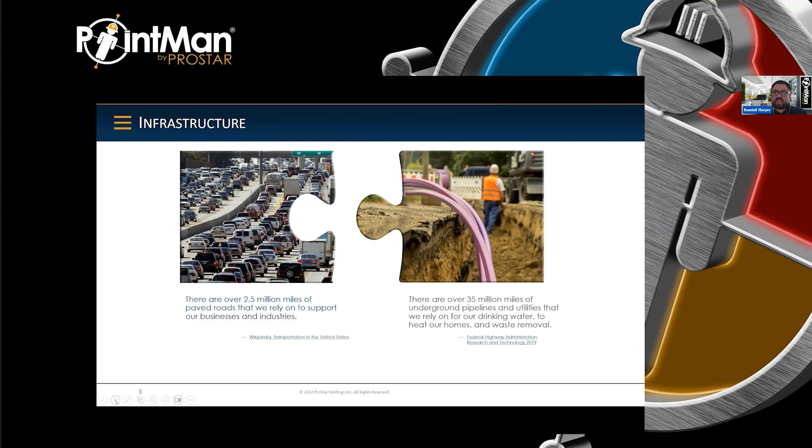So there are 2.5 million miles of paved roads that we rely on. But on the other hand, there are 35 million miles of underground pipelines and utilities that we rely on even more. And this is for drinking water, heat, waste removal, and other things like that. And these infrastructures are interconnected. You can't work on the surface without impacting the below ground and vice versa.

Now, this is a cost saving study that was conducted where one project was using PointMan and one project was not using PointMan. They're of equal scope and value in the same city, and they were both 10 miles of highway over 3 years. Project 1 had 130 crew members, and Project 2 had 100 crew members. Project 1 had 3 line strikes. Project 2 had 147 line strikes. Can you guess which one was using PointMan? Well, that would be Project 1. But what does that mean in dollars?

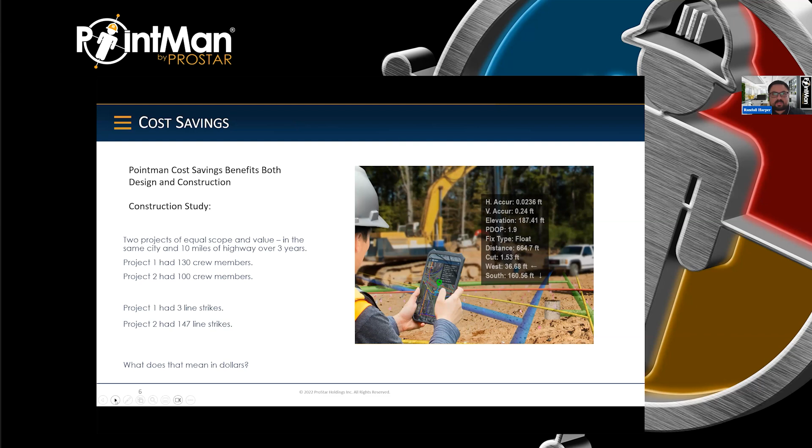The problem is utilities and pipelines are mapped using paper maps called as-builts, a form of design drawings that are how the utility or pipeline is initially planned to be installed in the ground. So that's the legacy way of doing things, using paper and just hand drawing everything based off like 35 feet west of the curb, or based off some survey marker that has been on the ground for the last 100 years.

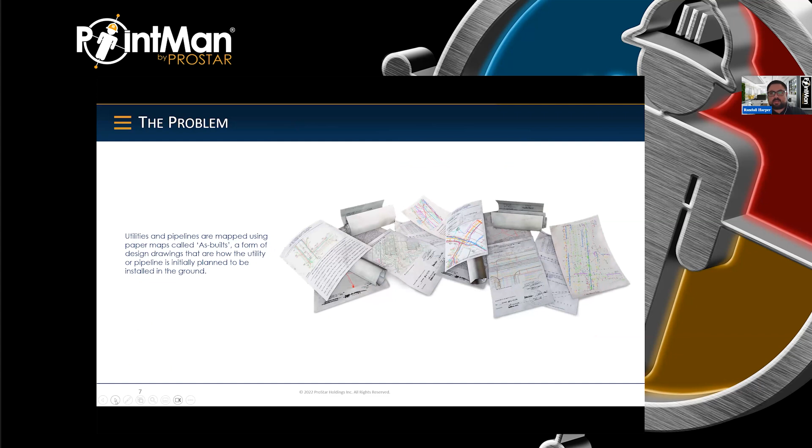Now, current practices include using electromagnetic locate devices and a spray paint can to approximate the location of where a utility is buried. The current methods do not provide precise locations or any supporting data, and stakeholders that take on liability do not trust these markings. What this means is you have people EM locating, painting the ground, and then coming in and resurveying and re-EM locating because they don't trust those paint marks. So they're doing double work because they don't believe what they're seeing with their eyes.

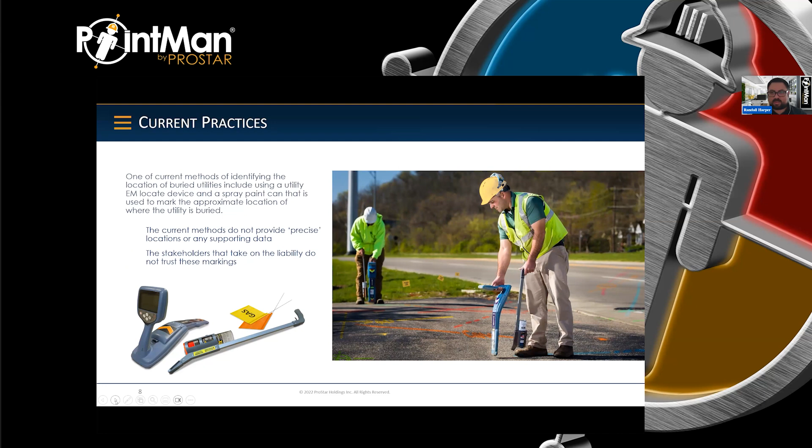And this is only getting worse every year because every year we are installing more and more underground, including 300,000 miles of fiber optic that goes into the ground every year in the United States. And that's not including the fact that we have to replace pipes for water, for sewage, for gas over time, and do a bunch of maintenance on the infrastructure in general.

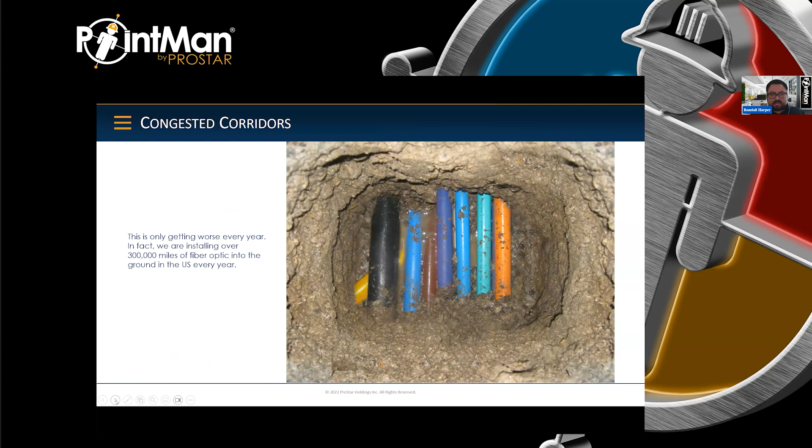A few key things to know about PointMan. It provides the ability to capture, record, and display the precise location of critical infrastructure both above and below ground, including buried utilities and pipelines. So what this means, just based on the image here, is you're digitizing everything by capturing it with your mobile device that's hooked up to your GNSS receiver and your electromagnetic locator. So all of this, instead of having to transcribe it on paper, is immediately digitized and turned into what is essentially a digital as-built, because it also contains the metadata associated to those features that you captured.

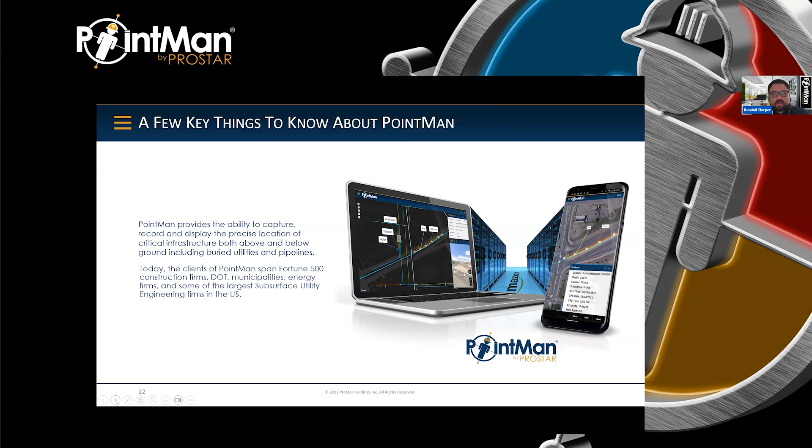How does PointMan work? Well, you take your locate device, pair it via Bluetooth to your mobile, and your GNSS, pair it via mobile, and both of them will sync up to the cloud after you capture things in the mobile device. It's that simple.

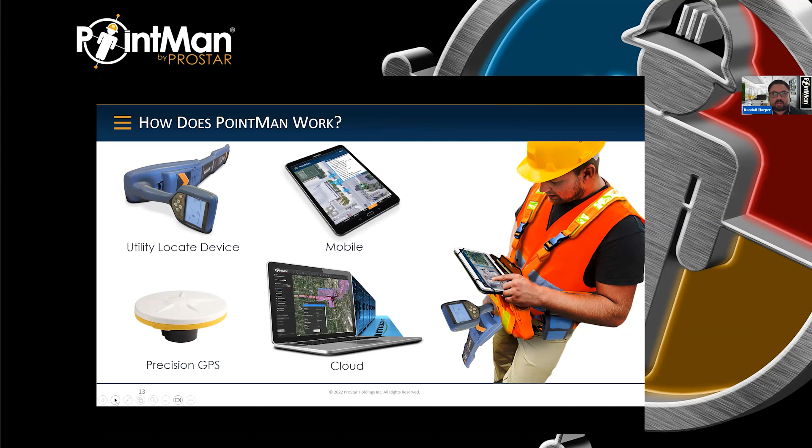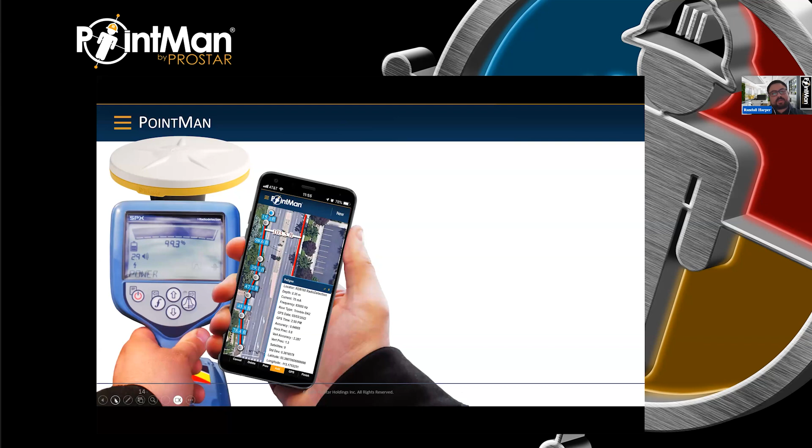So this is just an example. You can see this is an example of an as-built line that was on the right-hand side, and it was collected on the left-hand side with the Radiodetection and a Trimble DA2. And you can see the line is just on the other side of where the as-built said it was, and it's off by 100 feet. And I'm sure that we've all been there. And that is a pretty common problem as it relates to old as-built practices and modern locating.

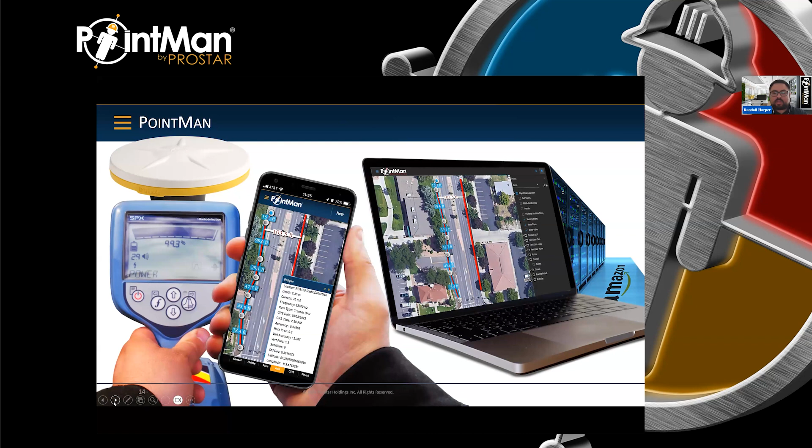But here you can see that what you see on the mobile is also visible on the cloud as well. So you can view it from your trailer or your office, the exact same thing that your guys in the field are seeing. So here's the PointMan workflow. Capture field data, process it in the cloud, and it's made readily available to team members.

We can capture precise test hole data with PointMan. You can include images as attachments, and you have the metadata associated with all this data as well. So you can see this selected point here in blue has the metadata on the left-hand side and then the image on the right. So you can cycle between those and basically see what the guys in the field were seeing.

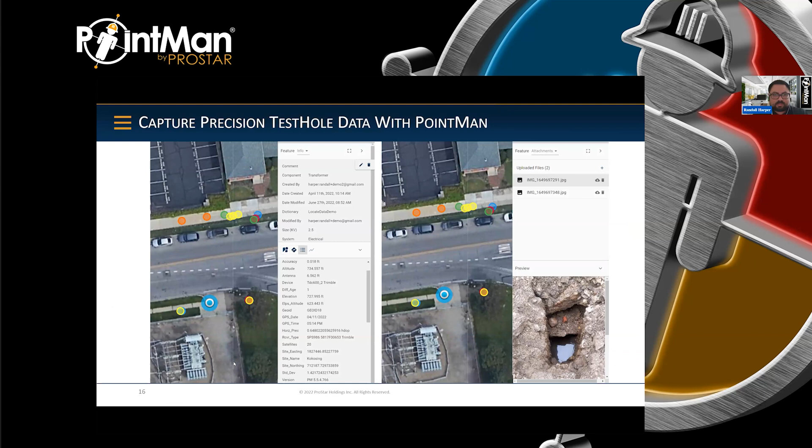You can recall and visualize data. So in this case, this is kind of just what it looks like to the guy in the field. But if you look at the tablet to the left, you can see that what he's seeing is actually how to get to that green point.

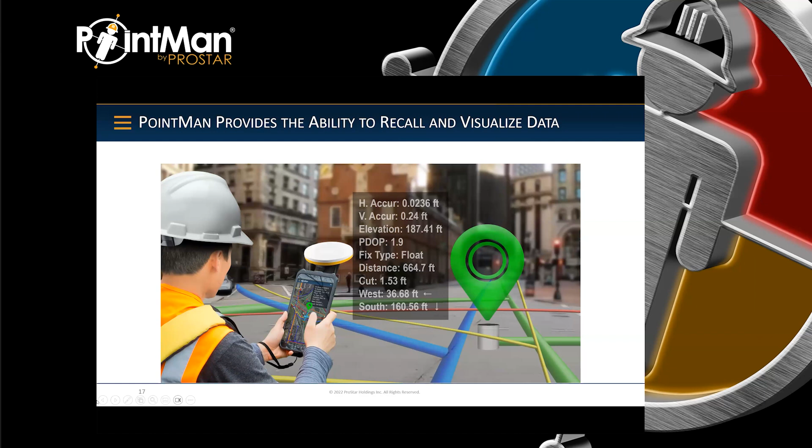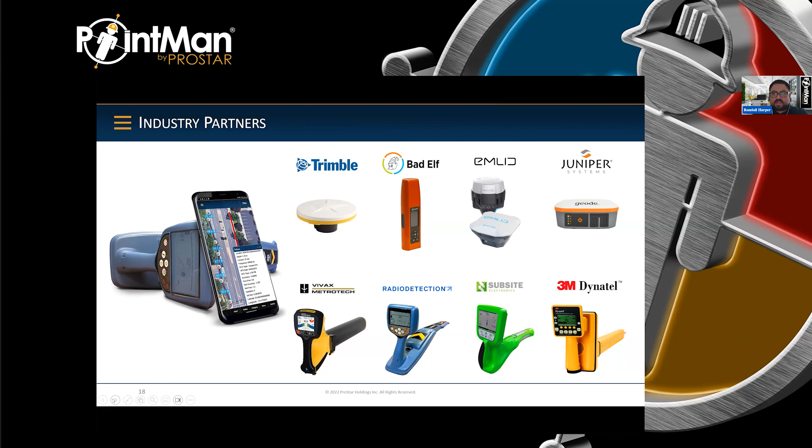Some government regulations. Digital records are becoming more relevant in this modern age. In fact, state governments are beginning to see this and have begun rolling out new regulations. One of them is the California Code 4216.3-5. Starting this January 1st, all new subsurface installations shall be mapped using a GIS system and maintained as permanent records of the operator. The CDOT mandate: the use of PointMan to capture digital records is mandated during all new installs in Colorado DOT right-of-ways.

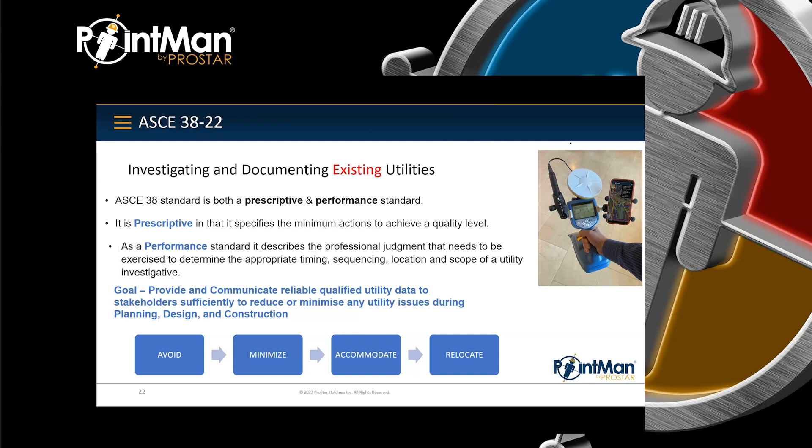And have the right of way to do it. So all of that takes time and effort, and that's what we're trying to accomplish. But we have a new standard, ASCE 75, that is also in play. And this started about the same time as 38.

In 1994, the National Transportation Safety Board had a summit where several of us were speaking. And from that summit, there was a recommendation that we do need better records. What we call as-built are not as-built. They're as planned or as designed, and there is no definition of an as-built or a legal requirement or a standard out there. So the NTSB said somebody needs to do it. Well, quite frankly, in 1994, that cry went out, but nothing happened.

However, in Canada, they were looking at developing their own ASCE 38 and started looking at it and adding in elements of how can we make better records, and decided, no, we'll just reference ASCE 38, but we'll come up with a standard on how to make a better utility record that's more accurate. And they called that CSA S250, and that was published in 2011.

Well, finally, in 2011, we looked at that here in the U.S. and said, you know, we need to get off dead center here in the U.S. and do something about this. So in 2013, ASCE put up a new standards committee. 10 years of development later led to ASCE 75-22.

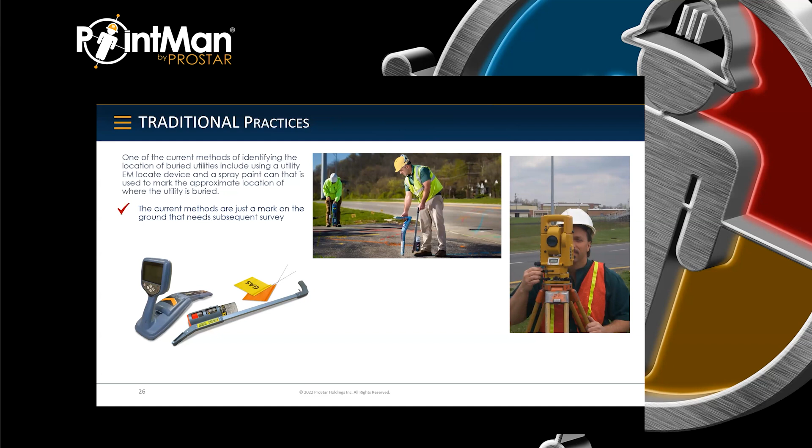But one of the things that we always had to do was, sitting in the office, figure out, is the mark on the ground right? Do you trust the person using that? Was the equipment calibrated today, or is it off a little bit? Was the person paying attention?

And without some mechanism to check that, other than running back out into the field and doing point checks sufficiently, and then checking to make sure what was in fact put on the ground ended up being surveyed, and checking to see if that ended up in the CAD file correctly. All of that was a lot of necessary quality assurance steps that you had to take. But what we're able to do is look at this data in real time in the office while it's being collected, or the next day.

Pretty soon, and we can look at it and say, oh, look at all of this data that's being collected from this pipe and cable locator. I've got the positioning aspect of it when it's got a GPS attached to it. It's giving me this signal strength. It's giving me this current direction. It's giving me this depth. It's giving me, I'm using this particular frequency. All of these attributes and metadata are available for each point that I collect in the office.

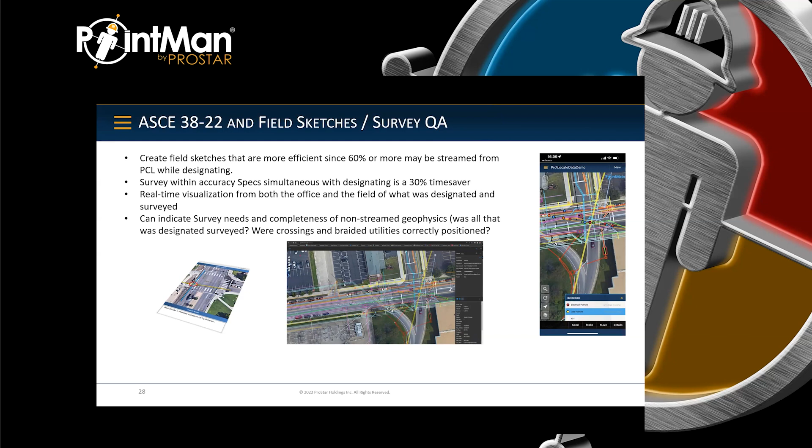And then you can also use that real-time visualization, both in the office and in the field, as you saw, in the cloud and on the tablet or phone, to see where you stand. This was surveyed rather than have a different crew out there. You can also then add in those geophysics that aren't compatible yet with PointMan, such as GPR, time domain electromagnetics, maybe a pipe and cable locator that doesn't have streaming capabilities, maybe a magnetometer. All of these kinds, and in a really complicated area where the utilities are crossing over each other and they're braided, it's really difficult to make sure that your field sketch is showing that correct geometry. So this real-time visualization is pretty nifty for that.

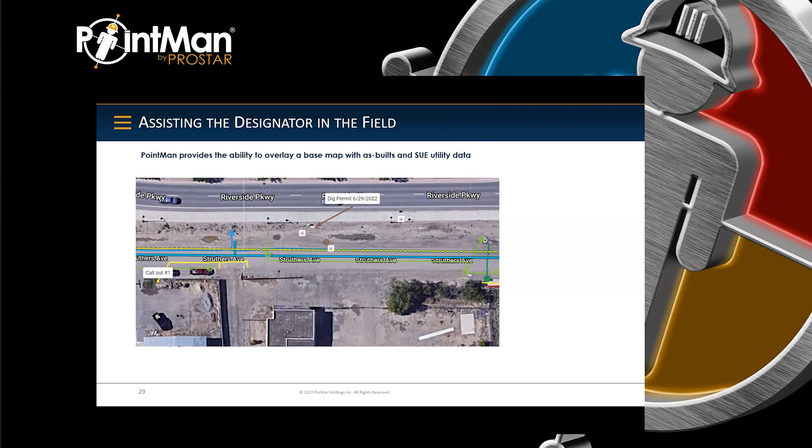So you can overlay also the existing record information. So before you even go out there, you can add in record information, and maybe it gives the designator in the field a little bit of a guideline as to what to look for. You know, there's two schools of thought on that. Don't furnish that information and they won't be biased, or furnish that information to help them not make an omission. So it's six of one, half a dozen of the other, but having it available at your beck and call, I think, is a good thing. It's just a matter of how much you trust it and when you use it and who you allow to see that data.

Another thing is, we are beginning to add depths to our data in the field so that we can bring it back and create a 3D model. It used to be that you'd have to put a mark on the ground, put a shot number on that mark, and either write in a notebook or write on the ground what the depth is, and the surveyor would come behind it, pick that up, annotate that depth in the field book, and it would end up with the CAD operator, and they'd have to do it. Lots of opportunity for transposition of numbers or mistakes. You know, another thing I've seen is people just writing a depth on the field sketch.

Well, you don't really know where that was. Was it in front of this house or the other house? So it's a time-consuming effort and a loss of quality to track this depth on paper or multiple touches of that depth information. But what we're able to do with PointMan is automatically, at least for the pipe and cable locator, get that depth. And we know that it's a pipe and cable locator.

So when we build that 3D model, we know that the depth is originating from the middle of that electromagnetic field, the middle of where it is originating from. So the middle of the pipe, which is important. If we had a depth from a GPR, for instance, it would be the top of the pipe. If we had a depth from a sonde in a big empty storm drain that was on a curve, it would be on the bottom of the pipe.

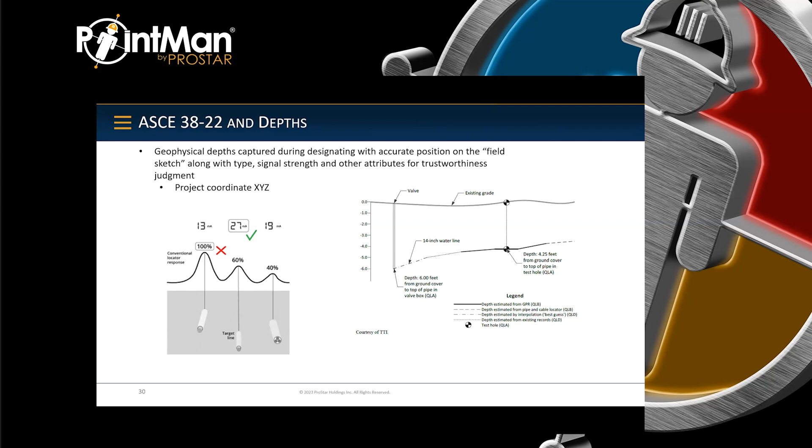So by this method, not only do we annotate a depth, but we can say this is the instrument that got us the depth, or the procedure that got us the depth, so that we can know when we're building the 3D model how to center the size of that structure in there. So another advantage there.

You write a note and you'd put it in the file saying, I'm having trouble in this area. I need my supervisor tomorrow or the next day to do this work because I can't do it. Or this instrument isn't working. I need somebody to come out with GPR. And if you don't write a field note, somebody's going to forget about it. It doesn't get done. So you have this field note, but on the field note, you have to say exactly where it is you're having this particular issue.

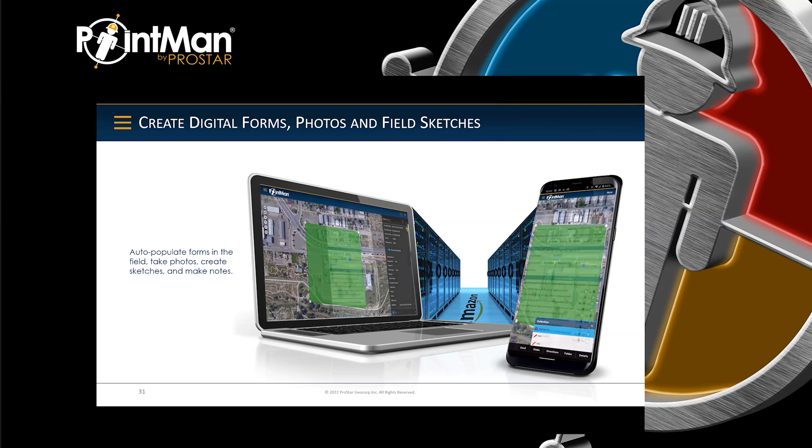With PointMan, you're able to create a point and attach a field note to that point. The same with a photo. So you're able to again be a lot more efficient with a higher quality with the concept of attaching at a particular area a form, a photo, a point, a field note, that kind of thing.

Now here's another advantage, which is a little bit more esoteric, but it happens all the time. On the left, that is a typical one call mark for an intersection. It's pretty busy, pretty messy. Looks like a pile of crap out there in the street, right? And on the right is what one particular SUE firm has said, you know, this is what my paint marks look like. Look how much neater that is.

Well, that's a pile of crap too, because you're not marking for damage prevention. You are marking for just the information needed to pick it up, to get it on a set of plans and know that you picked it all up. So you don't need these big long marks out there.

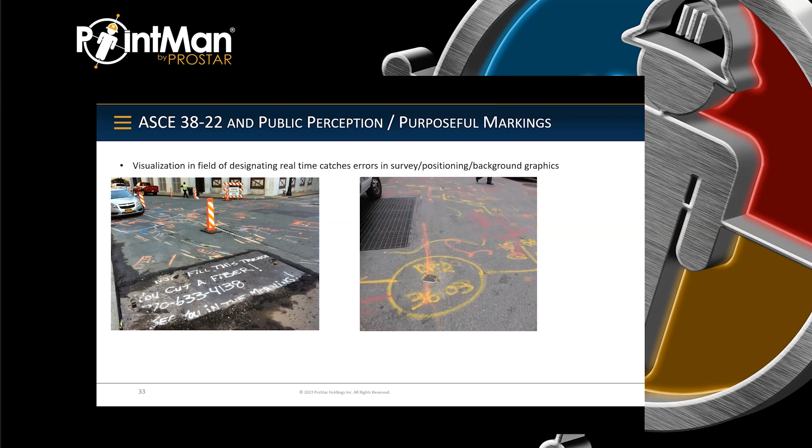So, you know, it used to be, okay, we're surveying this in a separate operation, but we're going to leave our marks very short and sweet, only big enough for us to know what it is we are surveying, and then go back and do some quality assurance checks. But now on the right, maybe you don't need marks that are even that neat and small. Maybe you can just put a point. Maybe it's just a keel mark on the ground. So it's a real advantage in what I'm going to call a purposeful marking.

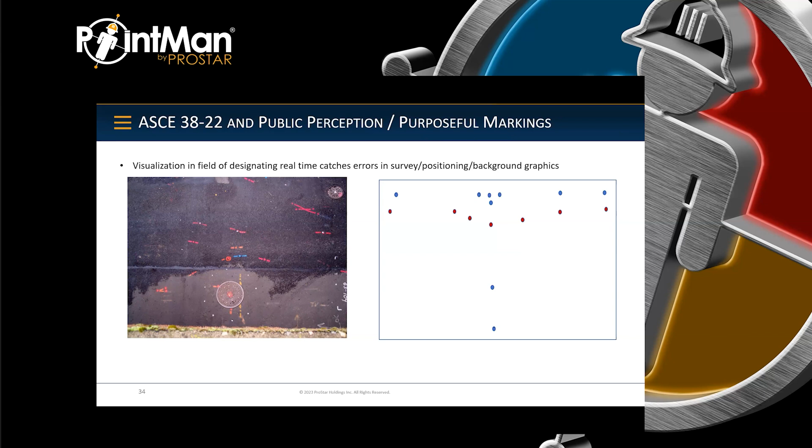We do a lot of test holes to actually prove what our geophysics are trying to tell us, or get information on size or material of a particular utility structure. And it used to be we'd have to dig it, expose the utility, we'd create a sketch, we'd do some measurements, we'd repair it, we'd have to go back out and survey the surface, we'd have to transfer that data to CAD, we'd have to do some QA, and then it would be finally given to the engineer to seal. And so he's got to assemble all of that.

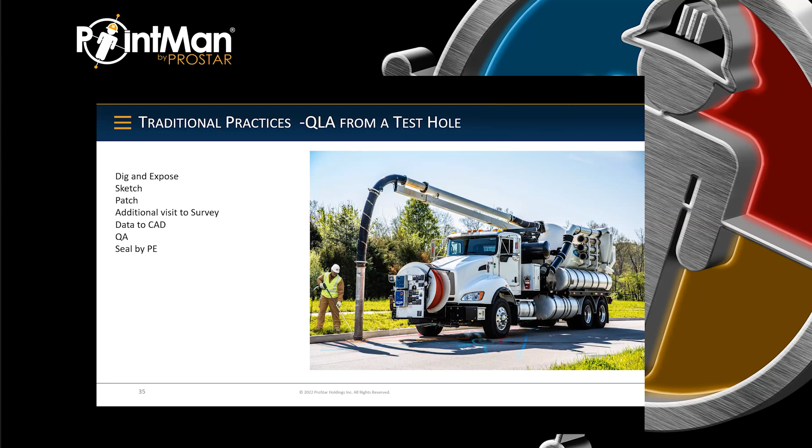But you could do it all in one step. You know, dig it, collect the data, survey it, patch it, look at it in the field in real time before you patch it, so you don't have to dig it back up if there's any question, attach a photo, and you're done. And the engineer has a way to monitor that in real time. Again, reduces field survey time, perhaps remobilization, questions that happen, all of that.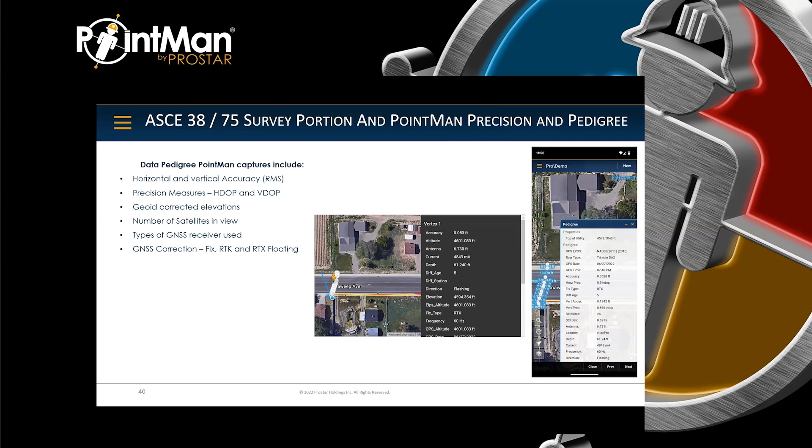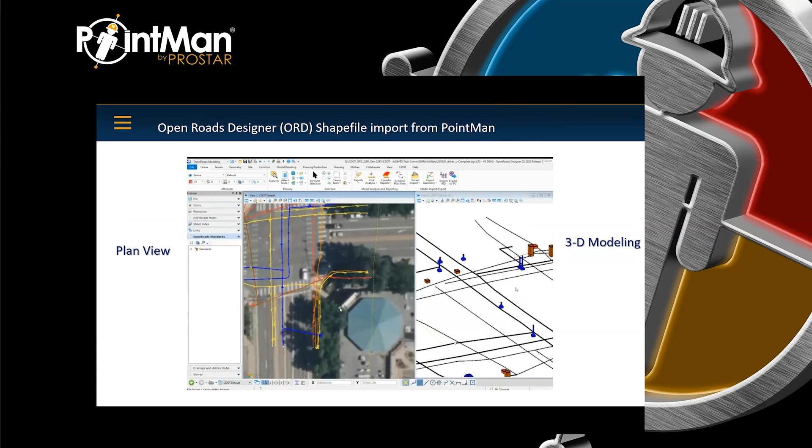So one of the things that ASCE 38 and 75 say is, you know, part of that job is survey. And with the PointMan system, you get what we call precision and pedigree. So we know what the accuracy is. We know how many satellites were out there. We know what the geoid corrected elevations were. We have precision measurements. We know what kind of receiver was used, and we can correct that receiver on the fly. Another big advantage is we can then use this and ship it directly from PointMan into Open Roads Designer or some other shapefile, and start the process of creating that 3D model.

Now, the final deliverable of ASCE 38 is a stamped drawing that shows each particular utility segment at its achieved utility quality level. Without a stamp by a licensed professional engineer, or in a couple states surveyor, you can't have a quality level, because the quality level is that end result that all the information was collected and processed under the responsible charge of a professional licensed in that state to protect the public health, safety, and welfare.

So PointMan provides ancillary data to help that PE make an informed quality level judgment by being able to look at signal strength and some of that data coming in and the survey quality. They could look at it in other ways, but it would be more time consuming and therefore more expensive, and the project may not stay on schedule. It also brings all that data into one centralized location for processing, which is a lot more efficient.

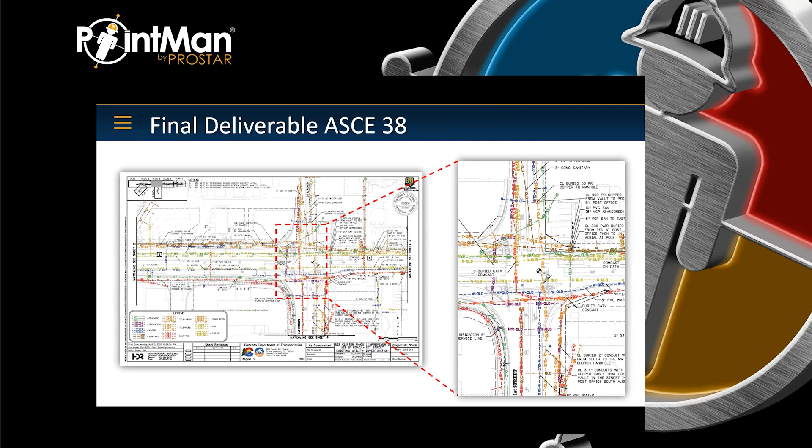So, here's a little bit in Colorado what that final deliverable would look like. There's an engineer's seal. Every utility segment or structure in there has either a quality level or an accuracy level. You're able to go back and look at how that data got to that point. It's pretty nifty. So that's kind of the advantages I see with using PointMan to assist the subsurface utility engineer in doing their job perhaps more efficiently. So with that, I wanted to leave some time for questions and maybe some answers if we have them.

Well, perfect, Jim. Oh, sorry. No, go ahead, Randall. Go for it.

Okay, so one of the questions: I'm excited to see you have a DOT behind your vision to help develop your system. In a perfect world, if you were to secure partnerships to get nationwide agreement in using PointMan, how would you deal with the datum survey projection components? Going area to area, would the PointMan software keep the coordinates in a consistent format or perform conversions for the subscriber? Do you think that would affect precision?

Well, I'm not a surveyor, so I don't have an answer for that, but I do know that we have been using this in multiple states for multiple clients with multiple different kinds of survey types and systems. And I can say that it takes a little bit of setup each time you go someplace new. But it does end up getting set up properly, and once it's all synced up and checked, it seems to go pretty well. So I would defer the true answer of that to a licensed surveyor or engineer surveyor who has been doing this in multiple states. But I do know it is being used in multiple states, and it seems to work in each one, regardless of the base mapping or the base survey components that you're trying to tie to.